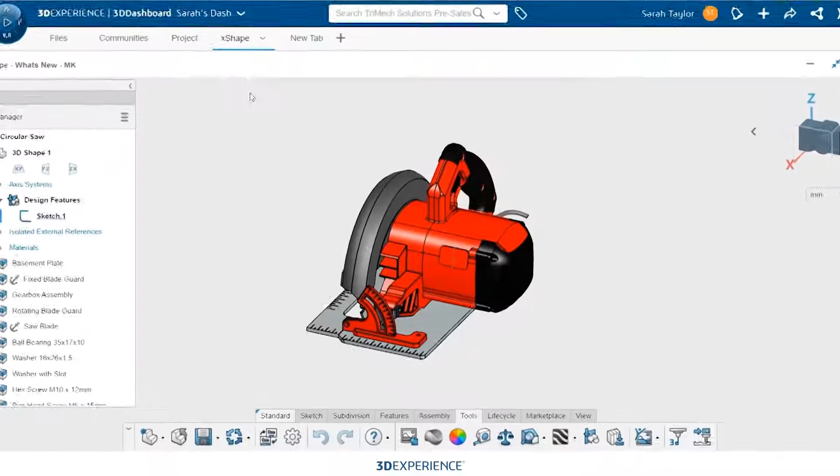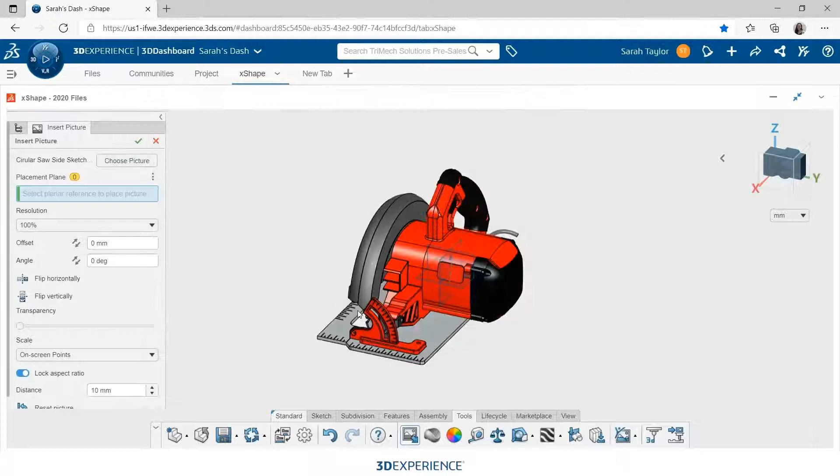I'll place the origin of this new component onto the center of the face where I want the component to be placed. I have a hand-drawn sketch of what I want the side view of this component to look like, so I'm going to insert that picture into my modeling environment on the center plane, or what will become the center plane of this component. That way I can use it as a guide while I manipulate the subdivision model. I'll make sure that the image is to scale, and then I will move it into place.

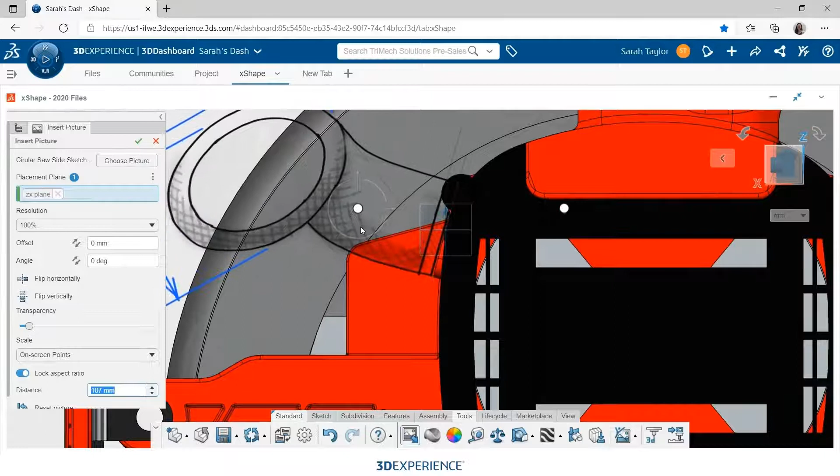The first step in subdivision modeling is selecting a primitive shape. I've selected a cylinder, so I'll go ahead and place that on the origin and enter parameters for the number of subdivisions in each direction. And I'm going to opt for creased edges so that I get a traditional cylinder shape rather than a rounded cylinder.

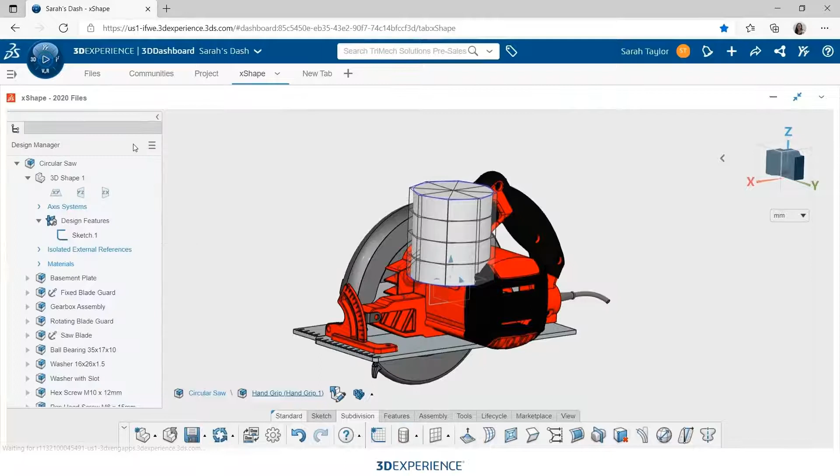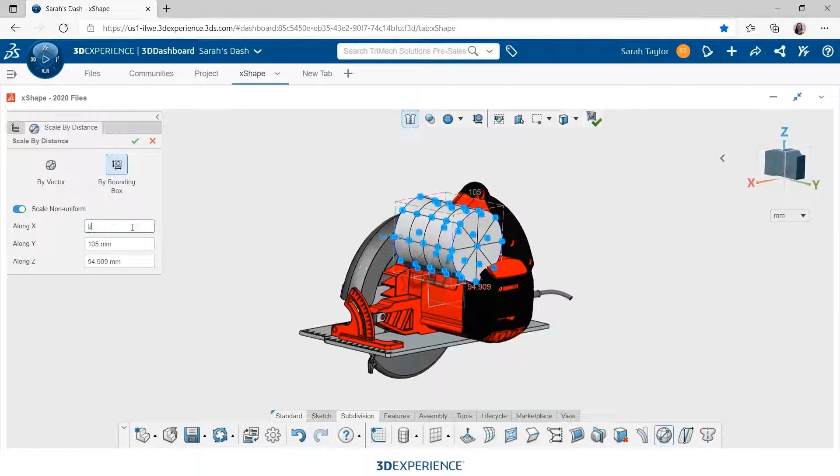I'll do a quick 90-degree turn. And then I want to scale the entire subdivision body so that we get that elliptical shape that we could see from the guide image. I'll do a non-uniform scale by the bounding box, and along the X we'll have 50 millimeters, then 75 along the Y, 35 along the Z. That's going to give me that elliptical profile.

I'll use a box select to highlight the entire body, and then using the move manipulator, I'll drag it into place and rotate with the arc.

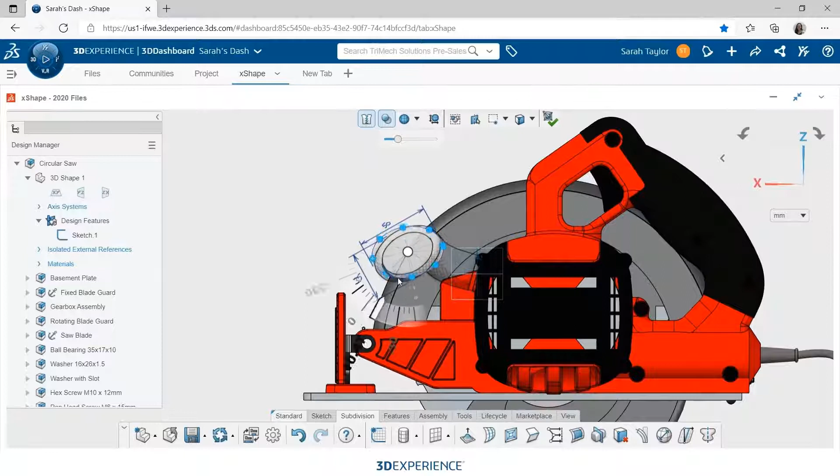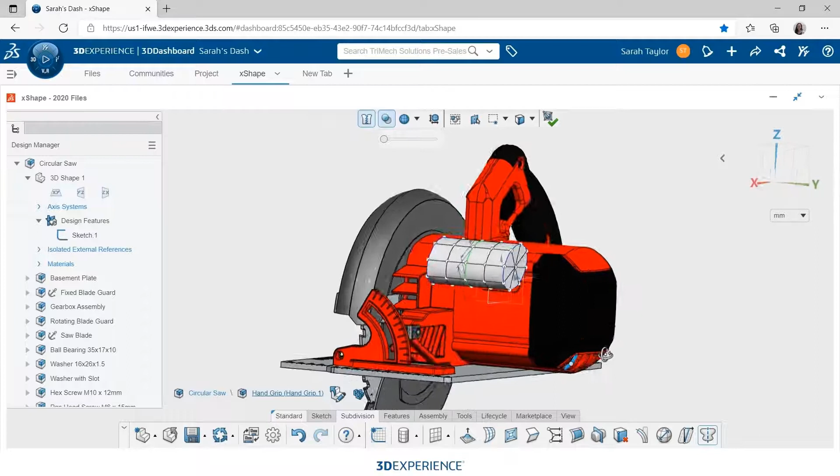Before I manipulate the subdivision model any further, I want to apply symmetry down the center of the model across the ZX plane. This will ensure any changes that are applied to one side are automatically reflected across.

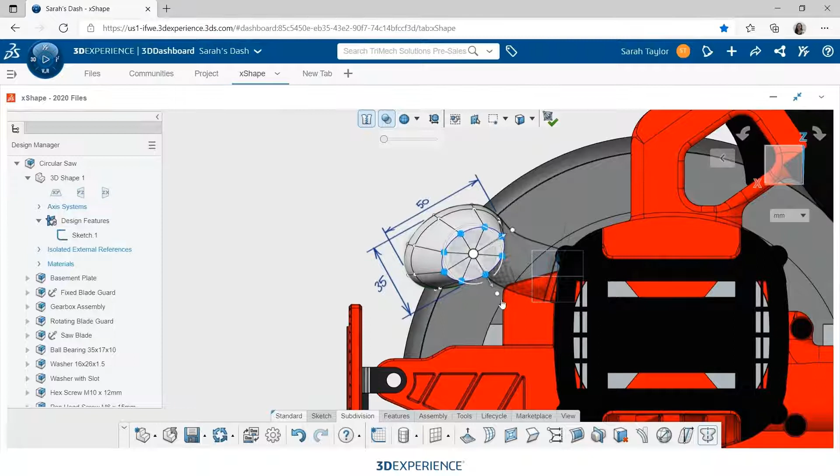So I'll highlight the vertices associated with that edge that is closer to us, and I'll shrink them down. Then, with those same vertices selected, I will drag them down and back. And this is the real magic of subdivision modeling in xShape, just sort of free form pushing and pulling to get these unique organic shapes, which would be otherwise pretty tedious to achieve with parametric modeling.

I'll finish the subdivision feature, and since this is complete, I will actually switch over to xDesign, where I can add the finishing touches for the base and the stem.

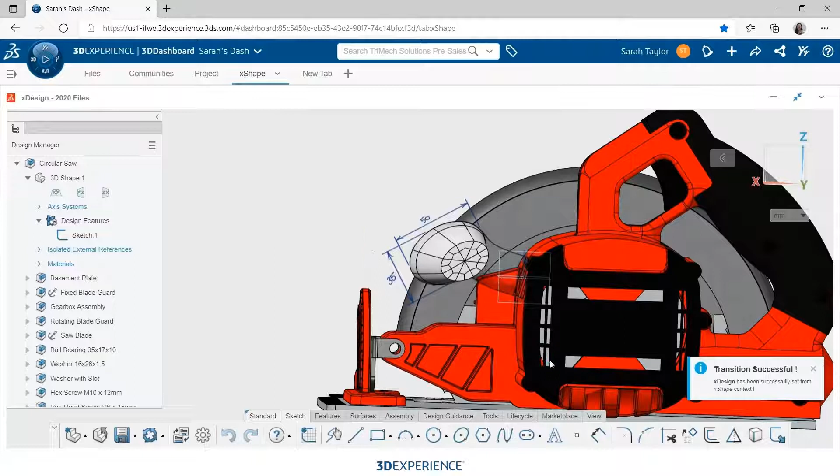The first feature I'll add in xDesign is just going to be a simple extrude. I can actually use the face of an existing component as the profile for my extrude, so I don't have to make a new sketch.

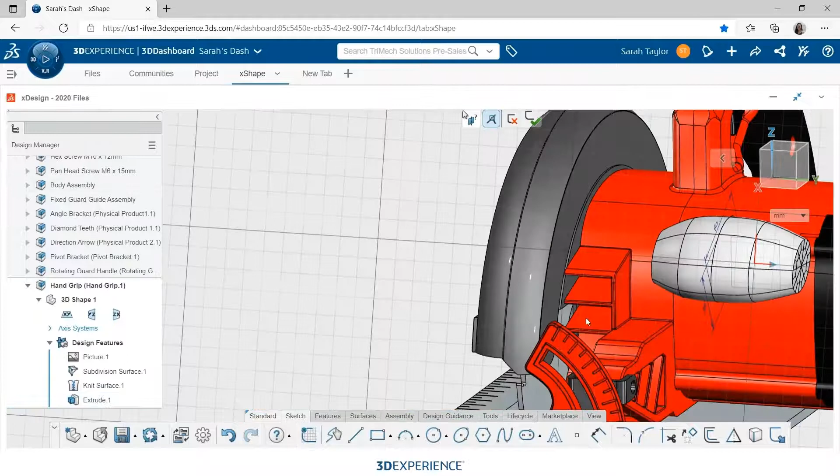Then, on top of that new extrude, I'll use the top face as my sketching plane for the cross-section of our stem. The profile of the stem will be an ellipse, and I can drag the endpoints of the ellipse onto the edges of this face to fully define its shape.

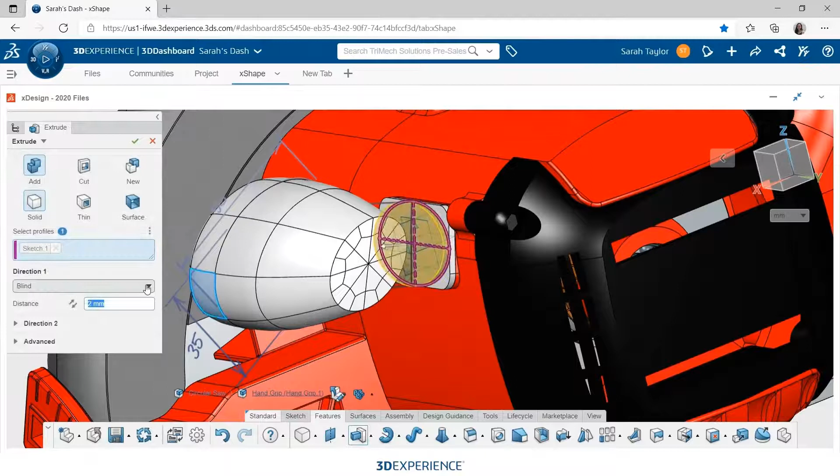I'll set the end condition to blind, just for a simple straight extrusion. But at this point, I'm evaluating the model, and I think that I would prefer to have a more curved, sweeping stem.

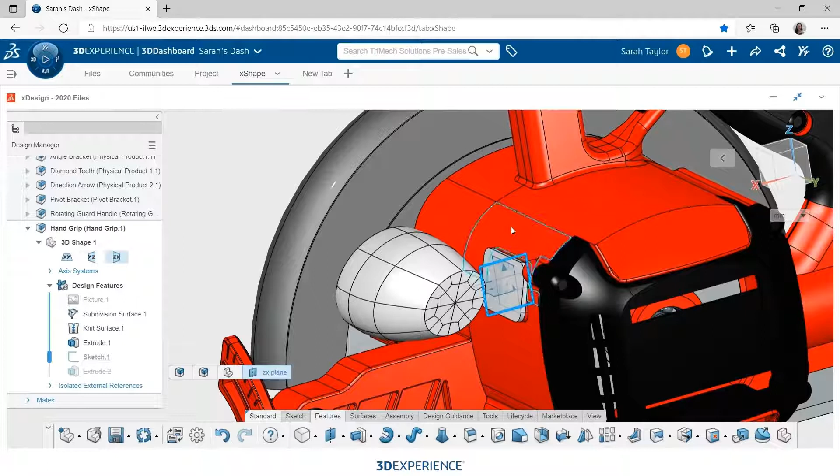I'm going to roll back to before the second extrude feature, and I'm going to insert a new sketch to use for our sweep path. I'll convert some existing entities off of the model into my active sketch, and then connect them with a spline. I'll add relations to the spline to control its shape and make sure we have a nice smooth transition.

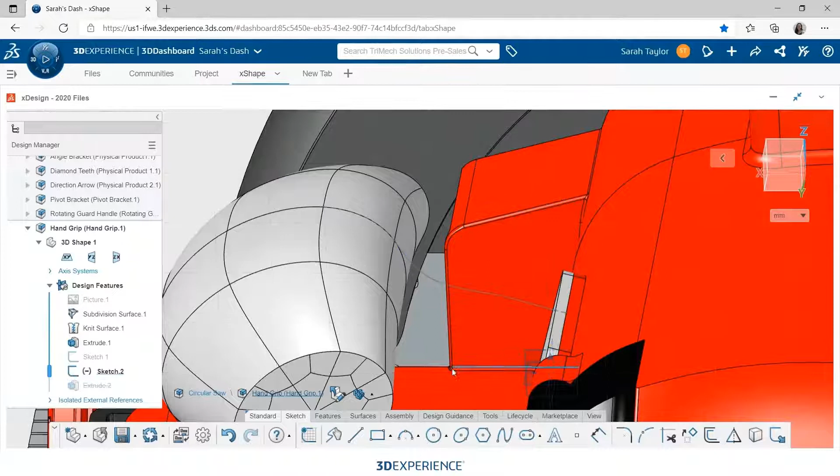In order to use this as a path, I'll need to create a sweep feature. But rather than deleting our current extrude and adding in a new sweep feature, I can actually just edit the extrude feature. Up at the top, I can change what type of feature it is. I'll change it to a sweep, and this will maintain relations downstream throughout the model. All I have to do is add in the path.

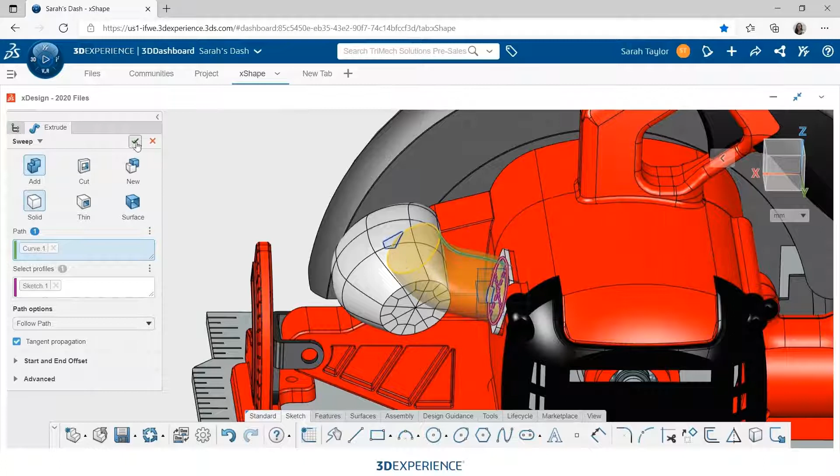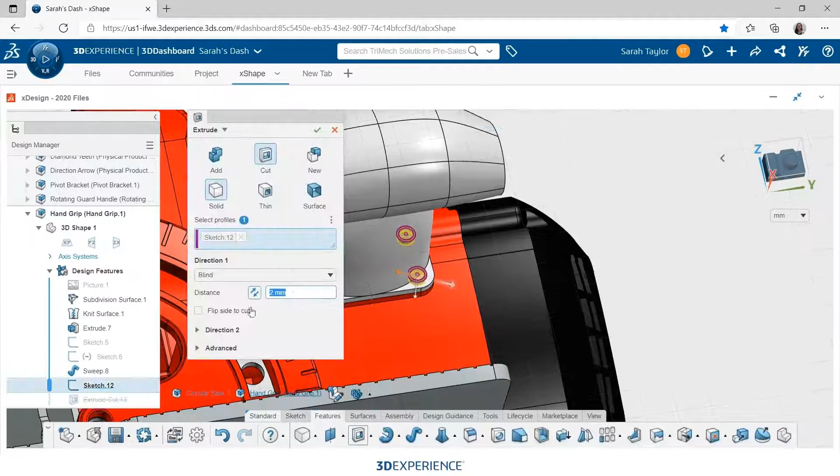So we can see the sweep feature blends a little nicer with the subdivision hand grip. I'll go ahead and hide some of these reference planes. And then I've sped up the process of me adding a few more design features, just some simple circular cuts and some fillets.

And now the component is complete. I'll change the view style to shading with smooth edges hidden so that we can see the true smooth nature of that sub D model and the fillets that connect it to the stem.

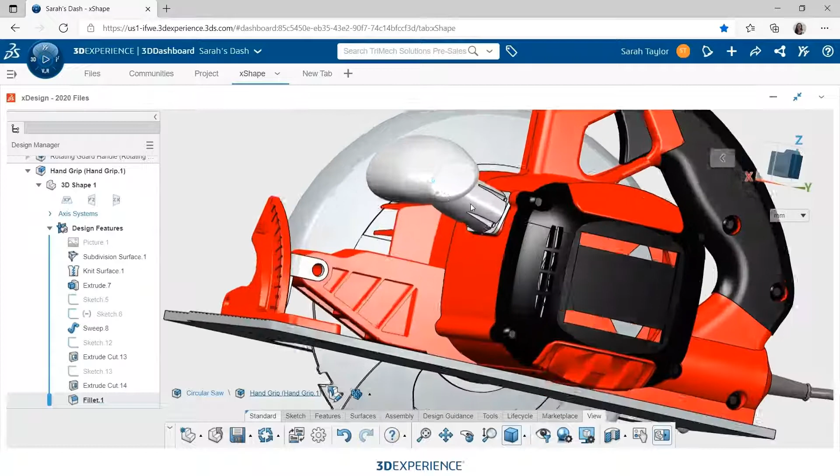This looks pretty great, so I'll go ahead and save my finished product for the rest of my team to have access to it. And lastly, I'll head back over to my project tab and change my task from in work to completed.

Now that the changes have been saved into our collaborative space on the platform, the rest of my team instantly has access to the most up-to-date assembly, as well as my new hand grip component. In the next couple of videos in this series, you'll get to take a closer look at some of the other x apps for designing on the 3DEXPERIENCE platform, including xSheetMetal, xFrame, and xMold.